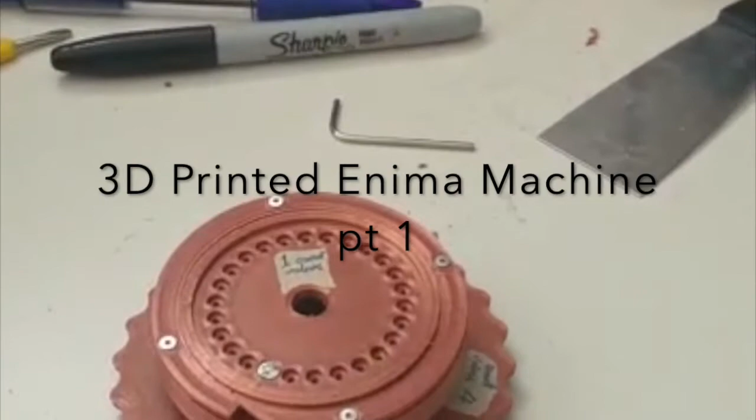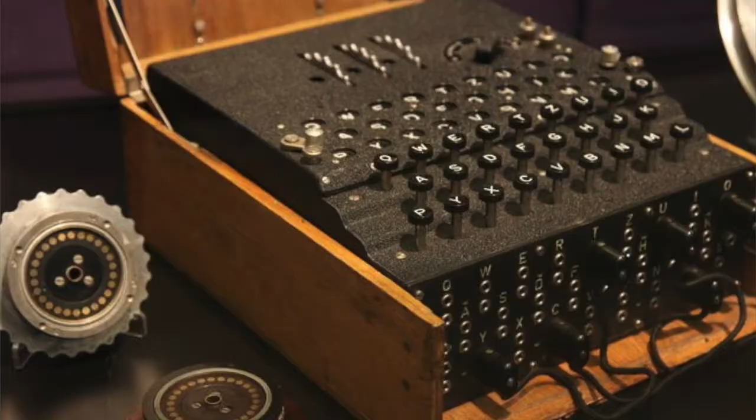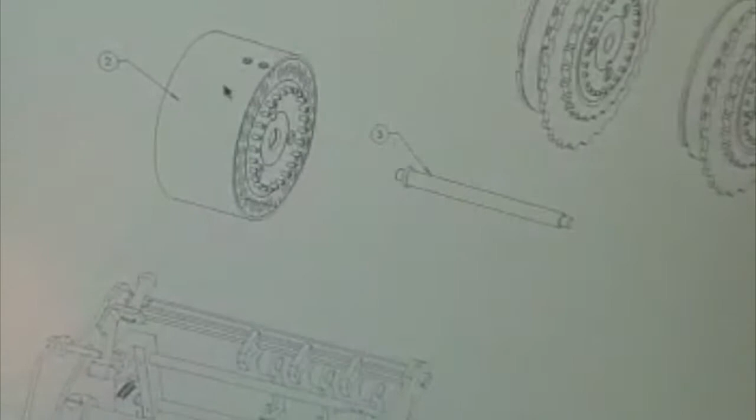Okay, so this is just an update on a little project I've been starting over the self-isolation period. The idea is basically to build an Enigma machine, or at the very least to try and start making some of the rotors that go in at the back. Maybe I can try and make this system at the back where you have the rotors and the reflector, so that we can try to actually pass an electrical signal through the rotor stack, back through the reflector, and then back through the rotor stack, just as a proof of concept before we start building the rest of it.

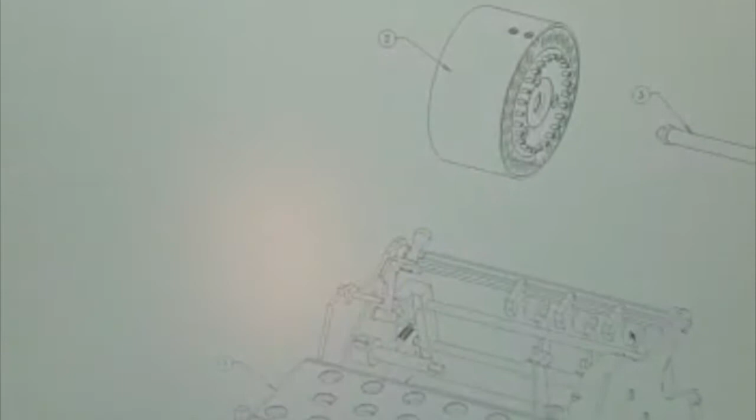In order to actually do that, I think it will probably be necessary to build up at least these side panels here, just so that we have something to stand it on, and also probably have the stepping mechanism, which you can't really see in this.

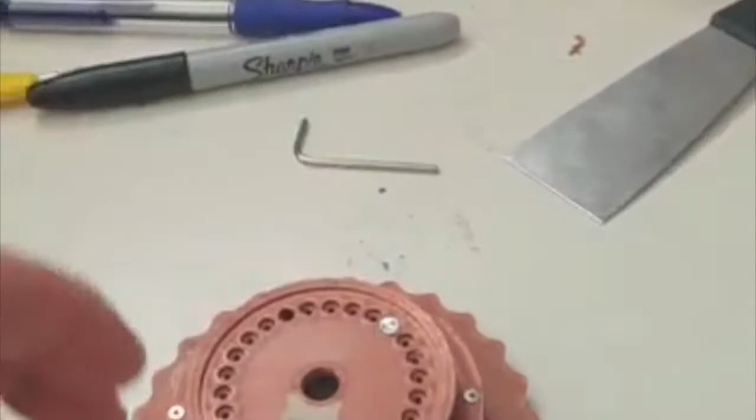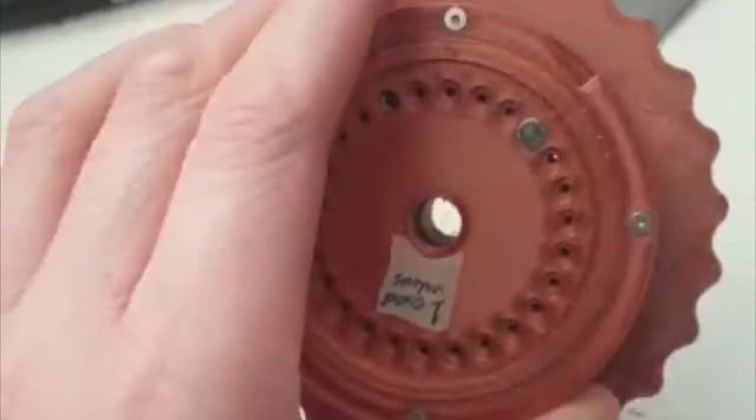So in terms of how far I've already got in this project, I've only just really begun, but I've started following these plans. You can see I've printed some of them out here, and then making 3D models, and then printing them out on my Ender 3 printer. So I've got them in this kind of copper filament, which I quite like, and they are very authentic based on the plans.

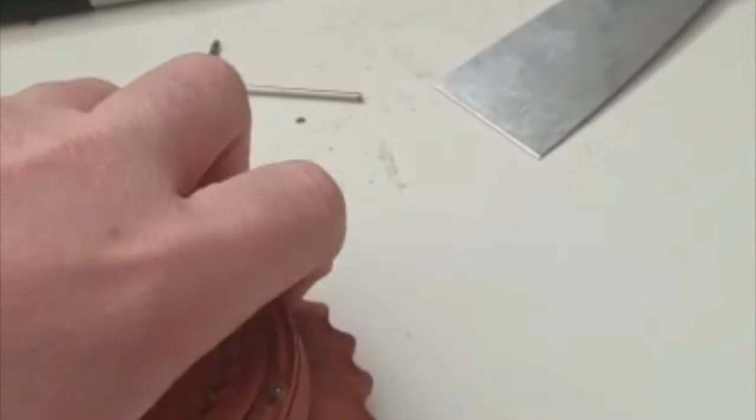If I can just take that apart - so I haven't done any of the inner electronics. You can see here I'm going to have to reprint this piece because I broke it, but I'm thinking about using nails to make the outer contacts, and then I'm still sourcing online the contacts that go in here, because they're meant to be spring loaded, so that when you have one rotor stacked on top of another, it will make sure there's always a connection even when it's turning.

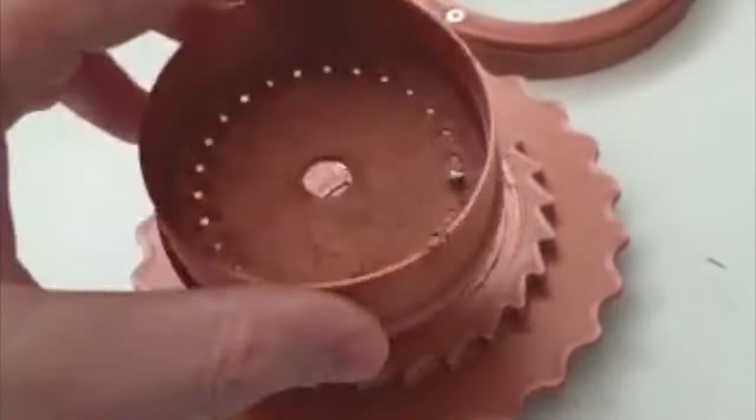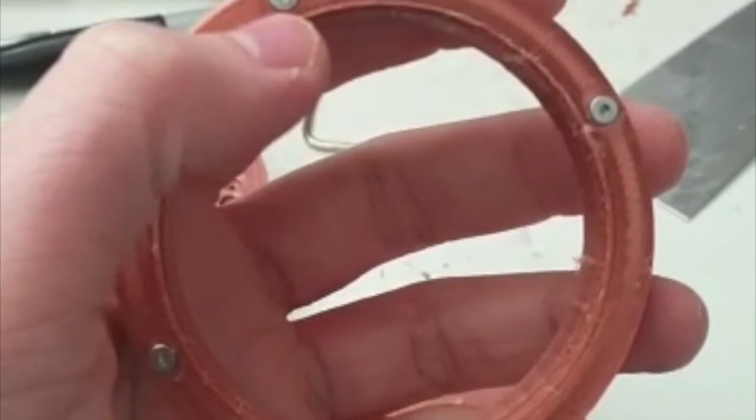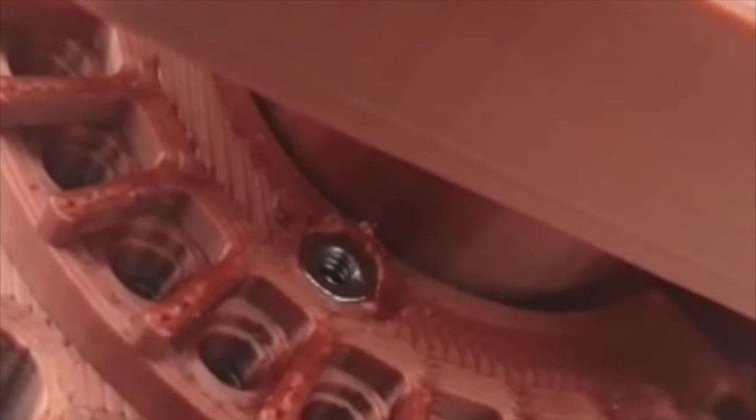I've started putting these together with machine screws, and some of these will just go into the plastic. Some of them are tapped and died, and then others, for example in the reflector here, I've actually put some of the nuts into the plastic, and then I can screw in so that it stays flush with the plastic, making a stronger bond than if it was just screwed into the plastic itself.

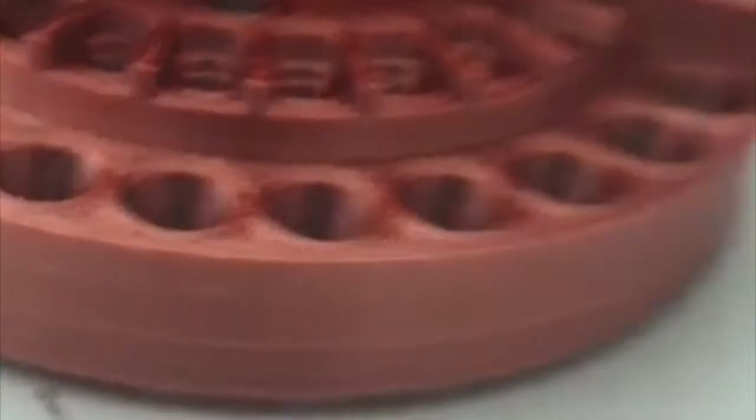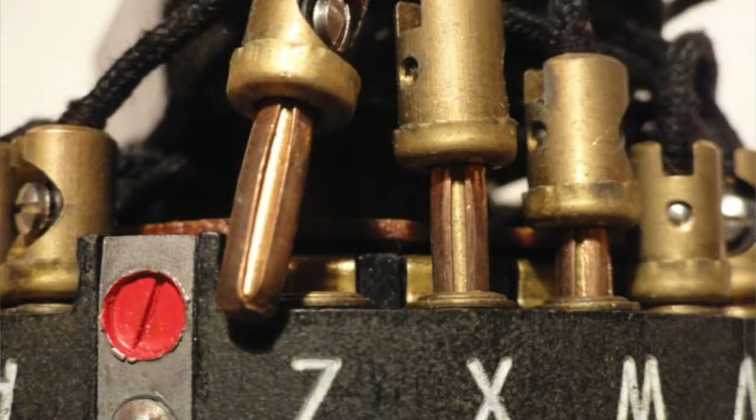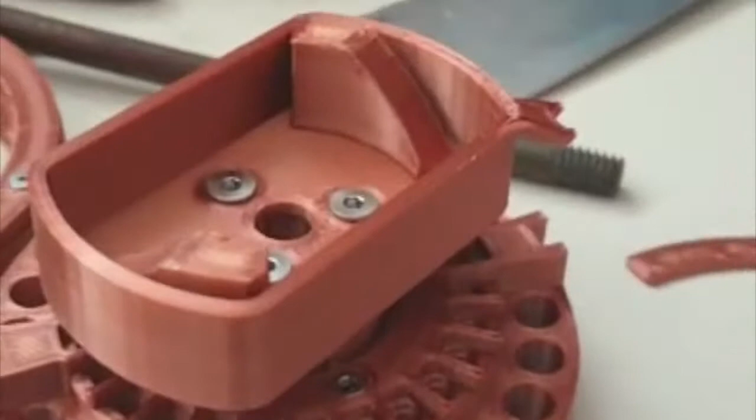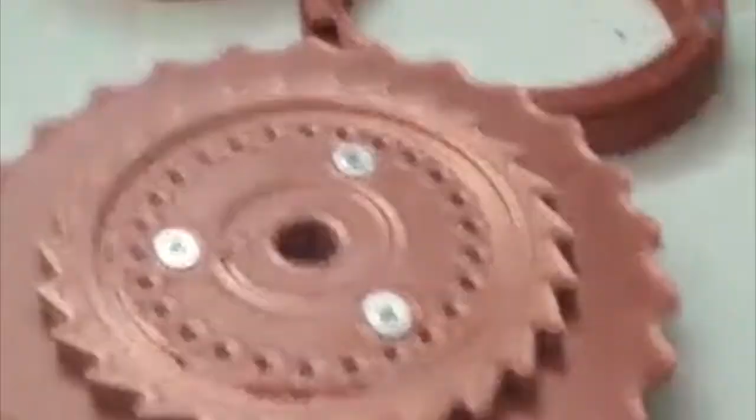Now, in terms of what I need to work out in the coming weeks, I've got to work out what I'm going to use to make these little metal plugs, and then I'm hoping that the spring-loaded pins will work. I still need to order them, and then I'm hoping that, at least by the end of isolation, I will have worked out a solution where I can have spring contacts, and I can actually start to make the rotors go on the rotor stack.

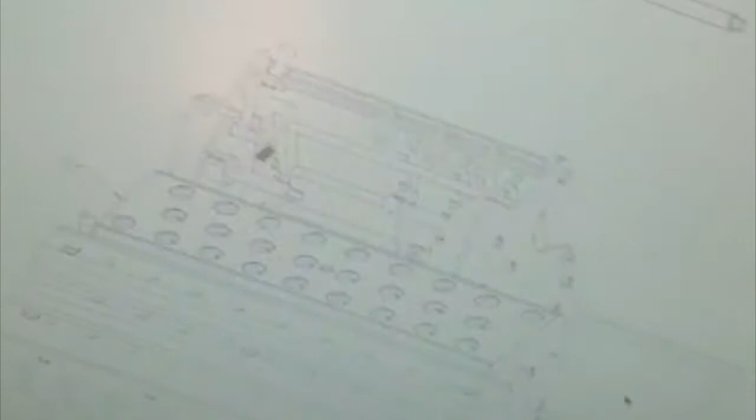Now, in terms of what I'm thinking for the rotor stack itself, I'm going to probably make the base out of wood, probably, I don't know, not MDF, maybe plywood, just as a starter. And then I'm not really sure - I'll try and 3D print these side panels here, but I'm probably going to have to end up making them out of wood, because I don't think the 3D printed material will be strong enough, unless, of course, I slightly modify my 3D printer in order to be able to print with nylon.

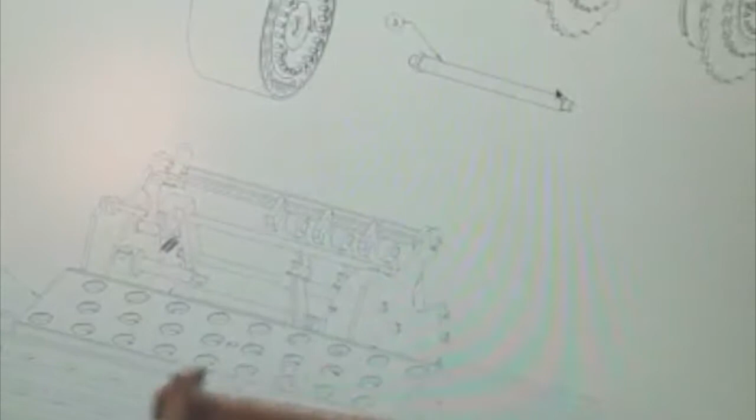Additionally, I think I'm going to have to change some of these cross pieces here into metal. I can probably get that online. And also this rod here, I'm probably going to replace with this metal rod, just because I had it lying around and it's almost exactly the right diameter.

I haven't thought about how I'm going to make these. We'll cross that bridge when we come to it. So yeah, I think in terms of what I'm going to design next, because I can't really do anything more on these until I've sourced the spring-loaded contacts, I'm probably going to finish designing these side panels.

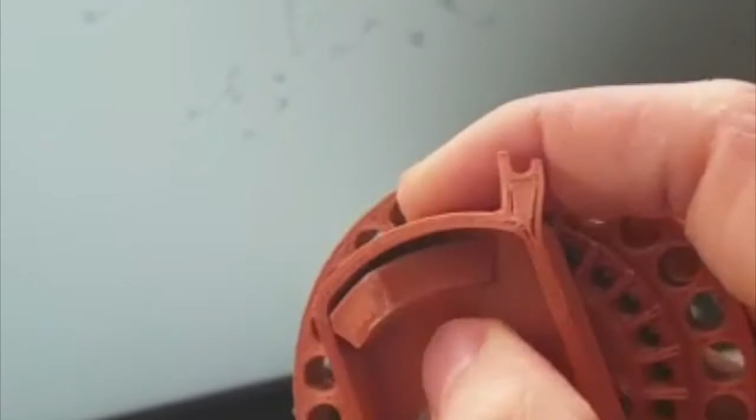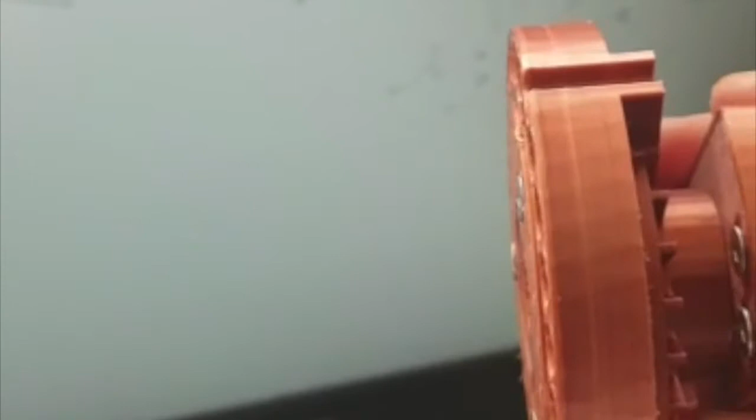Also you can see here there's this lever arm, and what this does is, there's these sort of, they're not cams, but they sort of serve almost the same function. Basically, this lever arm has two poles which stick out the side, and when you rotate it one way, it's pushing on these, so it's locked in, and when you push it round, it goes down into these furrows here.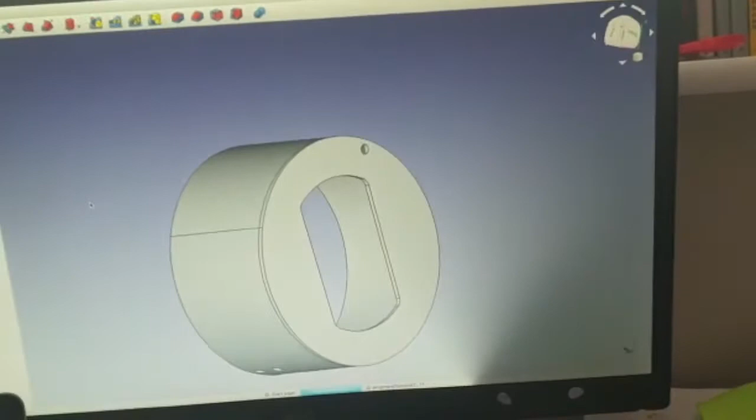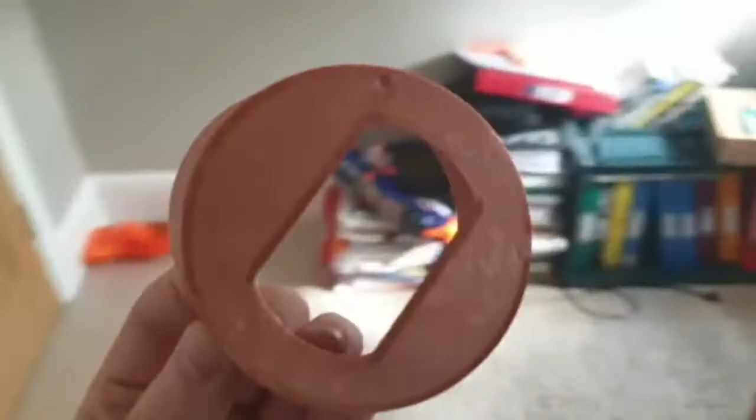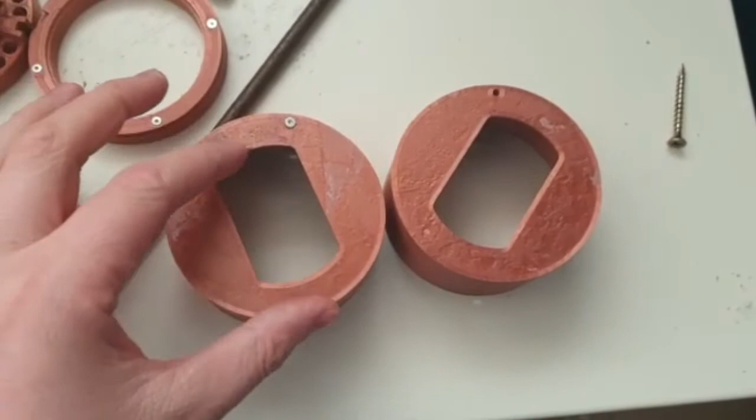This is FreeCAD, the program I'm designing all the parts in, and you can see that this is a model of this piece here. I had a few troubles with this model because in my initial print I put the hole in the wrong orientation, so you can see the difference here. This hole was rotated through 60 degrees to the wrong side, and now you can see everything lines up perfectly, and it fits on like that onto the larger piece.

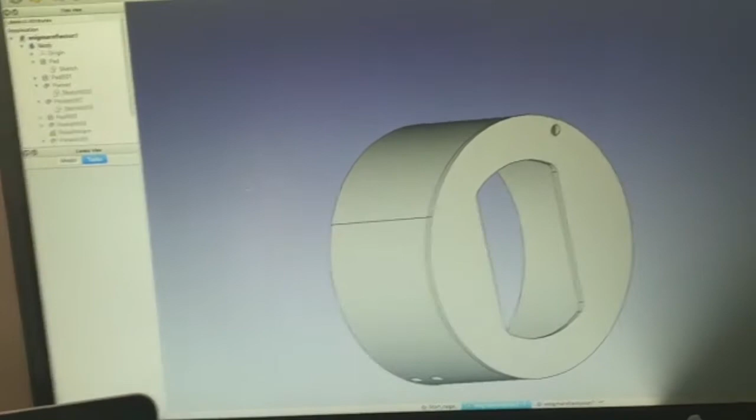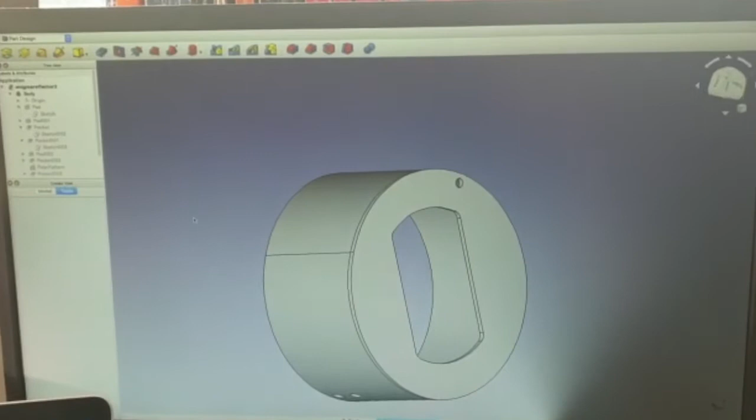So once I've designed something on there, I can export it as an STL and then slice it to be 3D printed. The reason I chose to use this software was mainly because of the price of all of the competitor software. I think other softwares which are often used are Autodesk and SolidWorks, and firstly a few of those don't work on Macs, and this is completely open sourced and free, whereas those ones can set you back thousands of pounds.

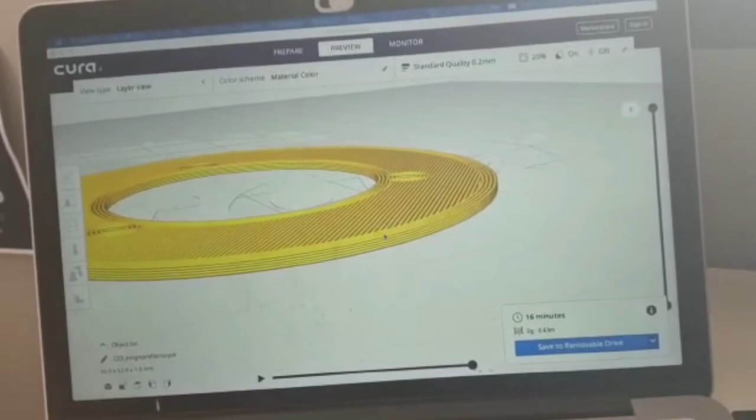Now, once I've exported it as an STL, I can put it into my slicer, which is Ultimaker Cura, and this is a different part. You can see I'm actually previewing it. It's a very small part. Normally I probably wouldn't even 3D print this, I would laser cut it, because it is just a flat object. But at the present moment I don't have access to a laser cutter, and so I will 3D print it. It's only a 16-minute thing, so hopefully that won't take too long.

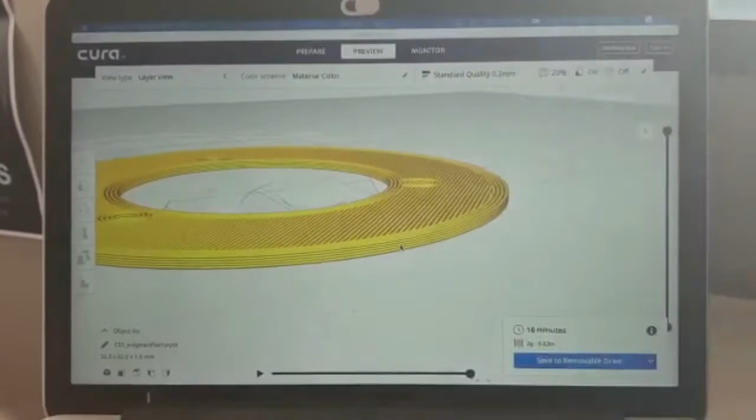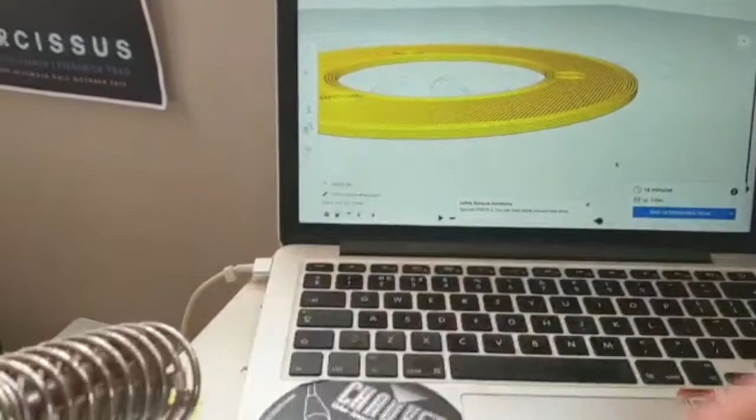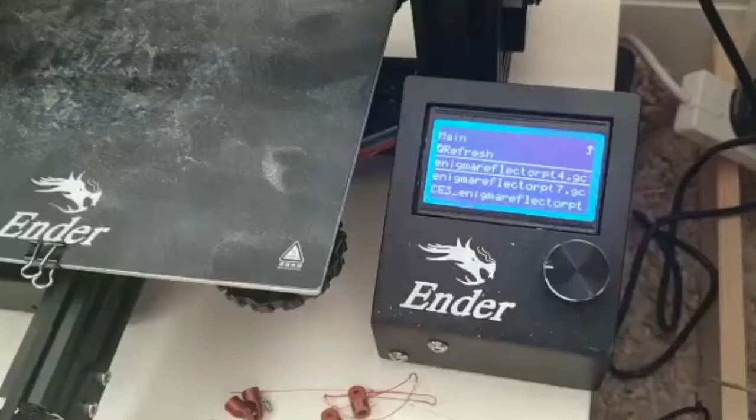And then I'll put it on my Ender 3. So all I need to do that is save it to a removable drive, which is this one here. Eject it. Hopefully it will say I can take it. Then just remove the SD card from there, and I just need to put this in, and when I select this, it will start heating up to 50 degrees for the bed and 200 degrees for the extruder.

So I'm just going to put a little bit of Pritt stick on there, just to hopefully make it stick better.